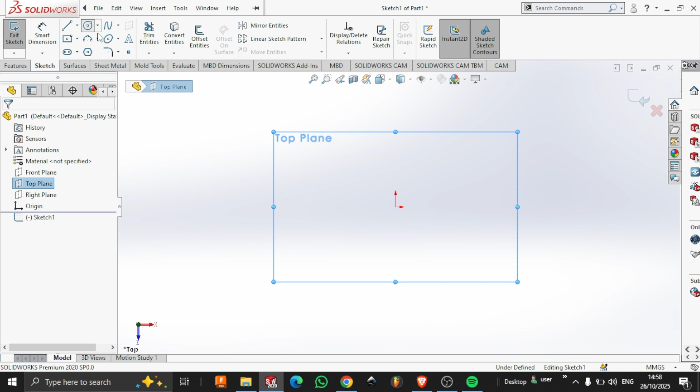Let's begin. Select your top plane, your circle tool, create a circle. We're going to give it dimensions. We're going to use 254 for our diameter.

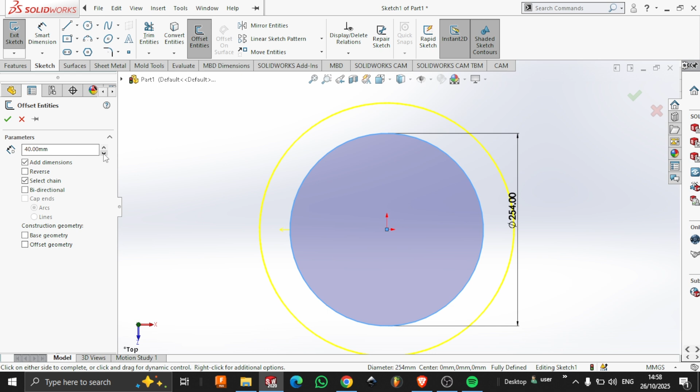Then we're going to offset this circle, let's say 40 millimeters. Reverse for it to be inside. Okay.

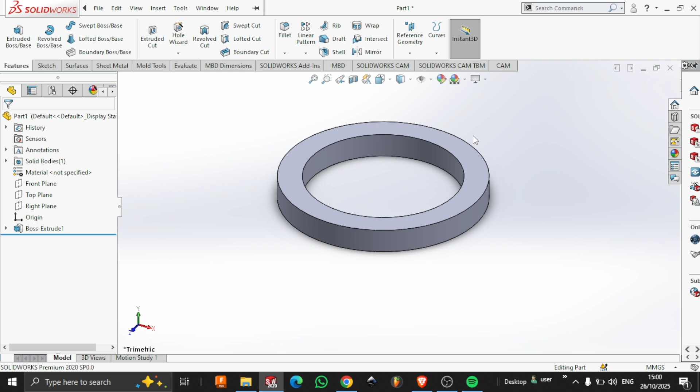Now, after this, I'm going to go to features, extruded boss. I'll extrude it to 30 millimeters. We have a perfect circle.

I'll select this face, sketch there. Then I'll select center line. Take this line, normal line to this part. Smart dimension.

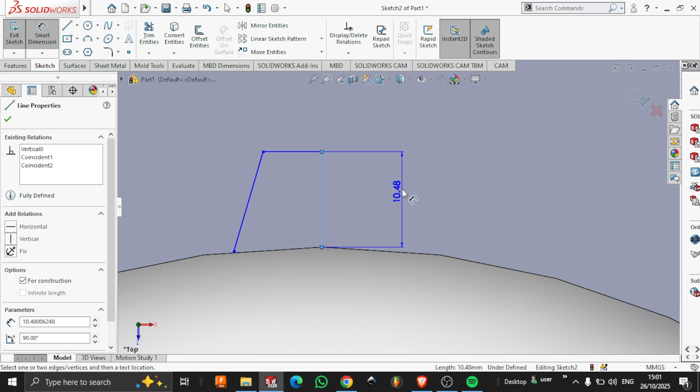Here I'll make it 2 millimeters. Then from here to here, I'll make it 3 millimeters. Then I'm going to select the mirror entity.

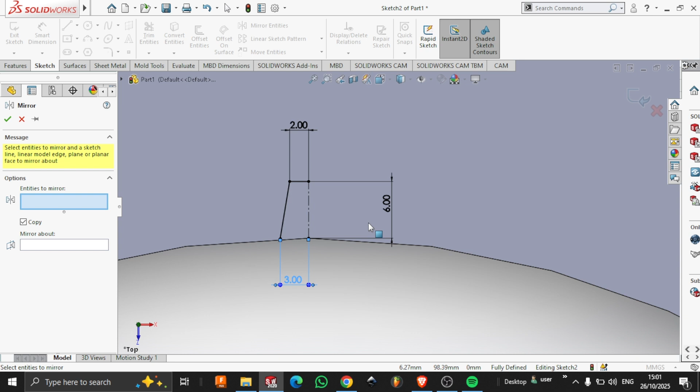Select these two lines, mirror it against that. Now I'm going to extend these lines like that. Okay. Then I'll join these two lines here. Trim entities, cut these two lines.

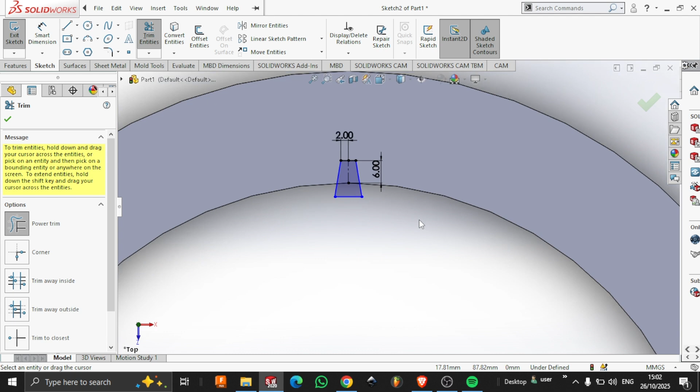We have our profile, our gear profile over there. I'm going to features, extruded cut. I'll go through all both.

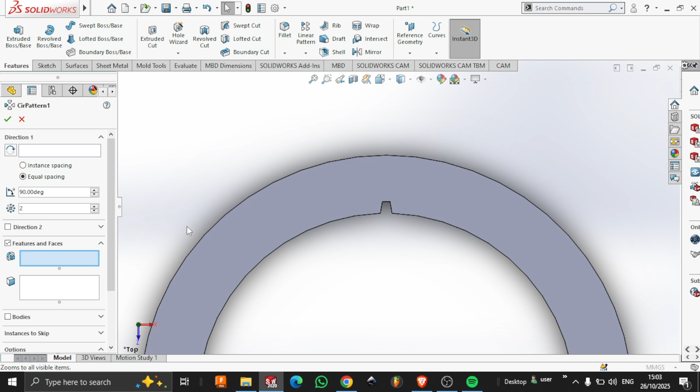We have our first profile over there. So I'll come here, linear patterns. I'll go to circular pattern. I'll select...

I'll come over this selection here, extrude cut, 360 degrees.

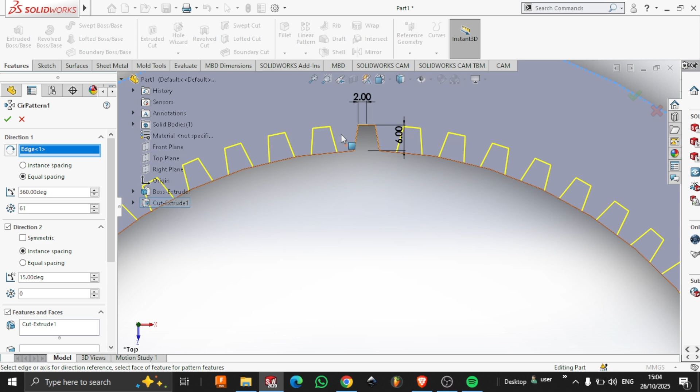Just like that, we've created our own ring gear.